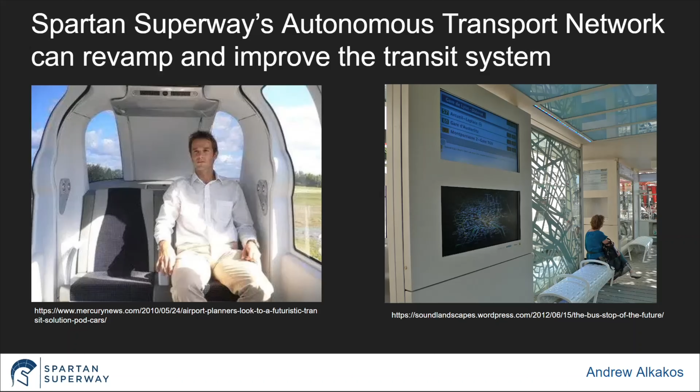Solar powered. Being powered electrically has many benefits relating to the environment. Exclusive guideways, ensuring a familiar and solo path that the pods will travel on. These traits of the Spartan Superway Project can be vital for our modern times that we live in today. The Spartan Superway Project consists of 4 teams: Switcharm, Track, IoT, and Boogie Chassis. The Boogie Chassis specifically, however, holds a high importance and is vital in many various industries.

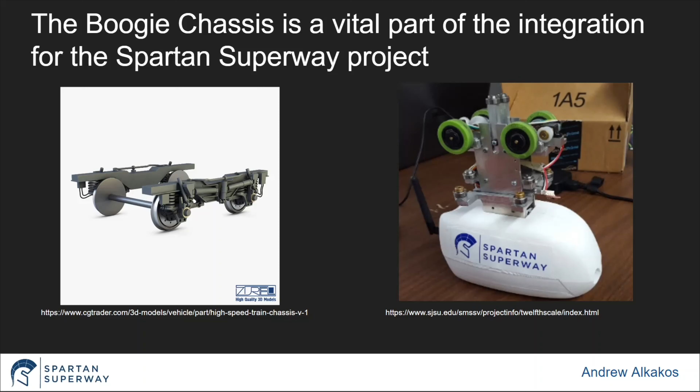The role of the Boogie Chassis Team is an integral part for the project. We serve as the base of the movable pod, as seen on the right picture. And because there are a lot of specifications and dependencies that teams need from us and we need from them, our project is even that much more important. This will be talked about later in the presentation.

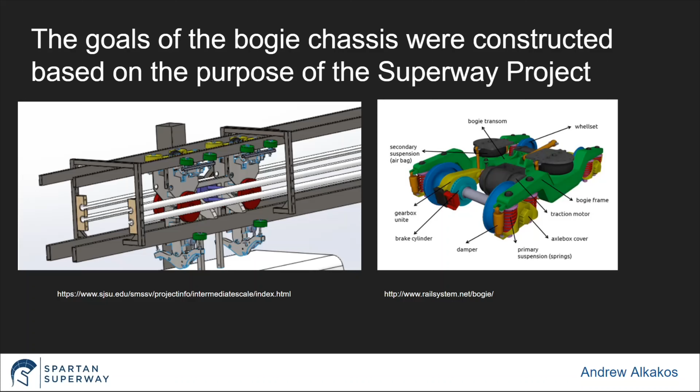Our particular project is to create a Boogie chassis that carries its energy supply and operates under wireless control while withstanding a designated load on the 10-meter scale model guideway. More specific tasks can be divided up into 4 different categories, such as mechanical design, sensors, power systems, and suspension. To achieve this goal that the Boogie team has, it is important that all the teams can integrate together smoothly to ensure the project as a whole goes soundly. Now, I will hand it off to Kristian to introduce the mechanical team slides.

We will now get into the progress that we've made on the mechanical team. Manufacturing is a major dependency for the Boogie and Chassis team. We want to ensure that anything we design is realistically attainable, considering the limitations of the manufacturing equipment that we have available to us. A majority of our manufacturing and prototyping will be done utilizing the machining equipment in the student machine shop, as well as the 3D printers in the Spartan Superway Design Center. We are currently waiting on confirmation regarding access to the SJSU Central Shop, as this would grant us access to the CNC machining equipment as well as the water jet.

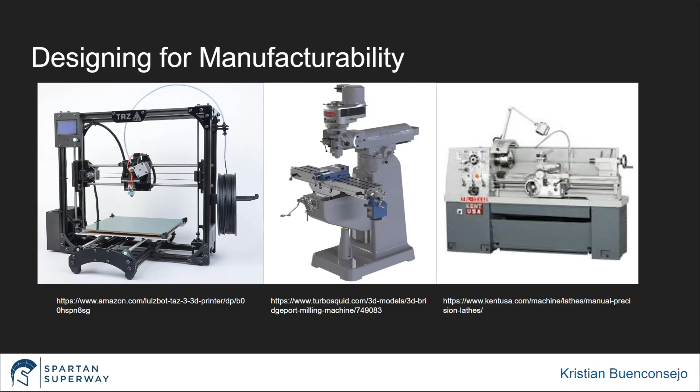As we move forward from the development phase and into the prototyping and testing phases, we will utilize the versatility of 3D printing and leverage its capabilities to get a better grasp on how our design actually interfaces with other components of the system, i.e. the track, switch arm, electrical components, and the cabin. This is extremely useful as we'll be able to try out various prints and designs and solutions in a short amount of time, and material consumption is generally more cost-effective than using metals to prototype.

Lastly, 3D printing will also help us reduce the overall weight of the bogie by enabling us to print out any components where metal is deemed unnecessary. Up next is Max, and he will be discussing design objectives, specifications, and challenges to overcome.

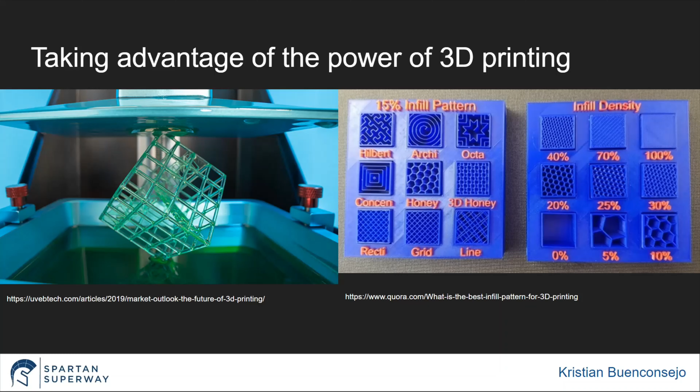It is expected that problems will arise during the design process, and specifications need to be created and implemented in order to solve these problems. First, the chassis must have the strength to support applied loads due to passengers, carriage, and traversing turns in the guideway. A suspension system needs to be implemented to minimize the rocking and vibrations from track irregularities and going around turns.

A 100-pound load will be applied to the bottom of the bogie to represent the passengers and carriage at this scale. The chassis needs to be compatible with the existing 10-meter track. To fit the current track, the bogie will have 4 wheels resting on the top of the guideway and another 4 wheels tilted 90 degrees to prevent lateral movement.

The existing railway gauge has a tolerance of plus or minus a quarter inch, thus the top wheels must have a 6.5 inch gap between them. In addition, the inner guide wheels must fit within a 6-inch envelope. In order to consider the bogie functional, it must also be able to navigate autonomously across the guideway using the data collected by the various sensors throughout the Superway system.

The bogie needs to be able to start and stop moving at a smooth pace for passengers, and we will be designing it capable of accelerating up to 12 miles an hour in 10 seconds. The bogie also needs to come to a complete stop at charging stations, close enough to wirelessly induce charge back into the battery. The battery will need to be sufficient to power all electrical equipment on board the bogie.

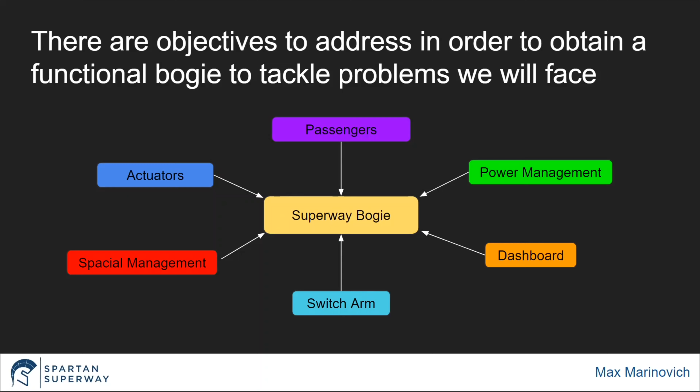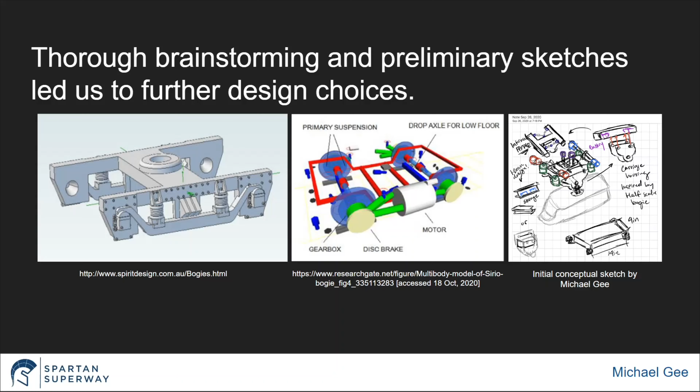During the brainstorming phase, we used a traditional chassis similar to the center picture on the slide, and we attempted to modify it with electrical components. One obstacle for design was suspension. The current design has taken inspiration from the first image for testing. The far right image on the slide was an early concept sketch showing components desired, such as cable management housing, switch arm platform, carriage attachment, and attachments for lateral wheel supports. Next, Max, Carlos, and I will introduce the progress we've made on the chassis.

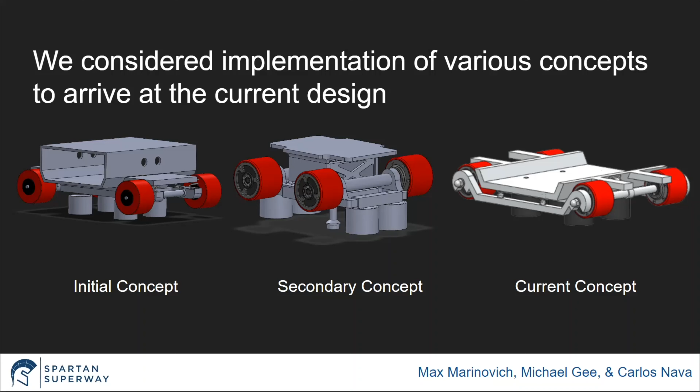Alternatively, the secondary design focuses on a smaller footprint with more experimental ideas and concepts for implementation. Next is Carlos with the current concept. Finally, the current design is a larger model intended to fit most of the components in a single surface. Michael will further expand on the secondary concept.

Alongside the development of the main bogie chassis is our experimental second design. For the secondary design, the design philosophy is to create a bogie chassis with a smaller footprint. Additionally, we wanted to emphasize modularity with attachable components to the chassis. These components include the cable management housing, switch arm cover, lateral wheel support, and pseudo-carriage attachment. Compared to the current design, the length and width are significantly shorter.

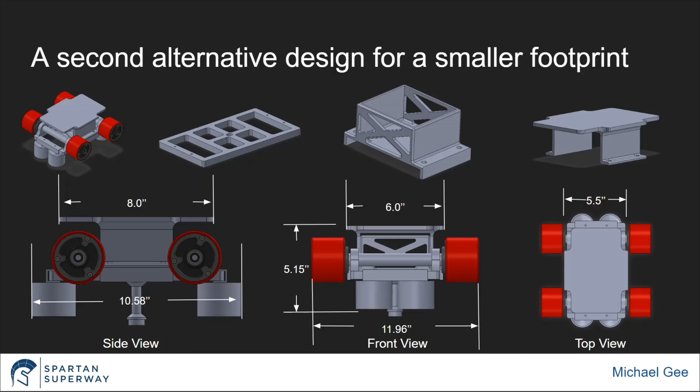In order to accommodate for the dimension constraints of the switch arm, we created a switch arm platform that doubles as a lid for cable management housing. The only downside to this design is that it does not have a suspension system. Next, Carlos will go more in depth on the current design.

The dimensions are subject to change if any new constraints appear when integrating with other systems, such as the track and switch arm. One thing that won't change are the main components that make up the bogie.

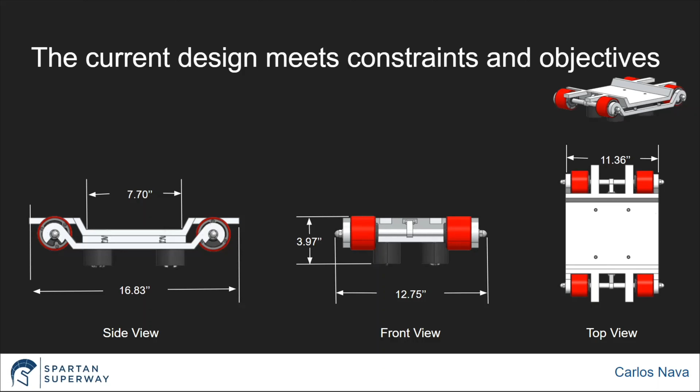The main components incorporated into the bogie design consist of the main bogie frame that will contain all the electrical components, such as the sensors and power system, in addition to the switch arm. Second, we have an axle that is fixed to the bogie chassis by an axle clamp, hinge, and dowel pin that will allow the components to rotate as the bogie oscillates.

Then we have lateral stabilizer wheels that will maintain the bogie on the track and restrict it from shifting laterally, which will be mounted using 1/4-20 bolts and wing nuts for easy installation. The suspension system is comprised of the suspension link and springs to counteract the vibrations acting on our bogie. The suspension is connected to the Maytech hub motors using 3/8-16 washers and cap nuts.

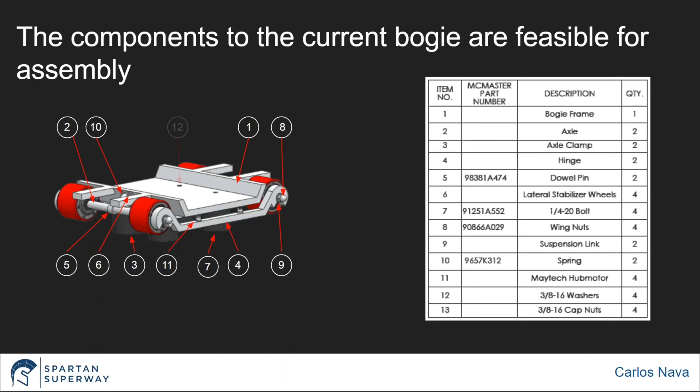The main components on the bogie can be clearly seen in the animation. In order to demonstrate how precisely all the components fit together, an exploded view of the bogie was performed. This is how the bogie is intended to be assembled and disassembled.

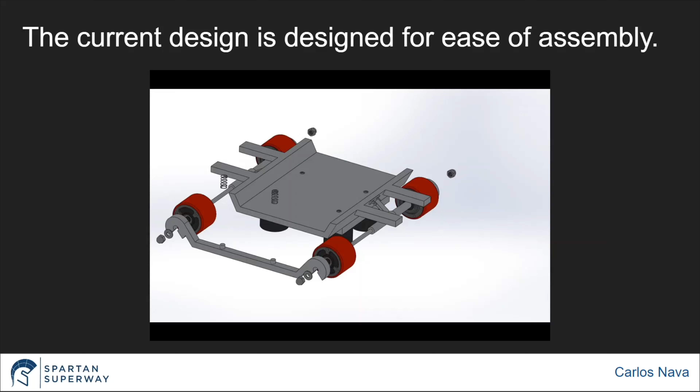For the first step, the cap nuts are unscrewed to enable the removal of the suspension system. Second, as the suspension is removed, the hub motors can be removed from the axle. Third, the lateral stabilizer wheels can be removed by unscrewing the wing nuts from the bolt. Lastly, the axle can be removed by removing the dowel pins from the hinge.

In order to decrease the amount of stress at the location, fillets will be added to avoid stress concentrations at the sharp corners, given that circular shapes are stronger and more resistant to deformation. Next, Devin will develop more on the electrical side of the bogie.

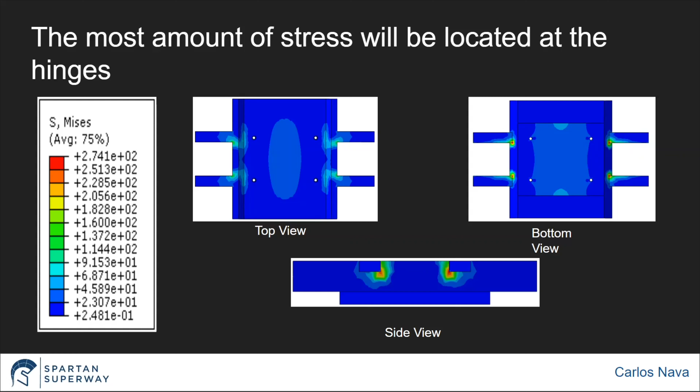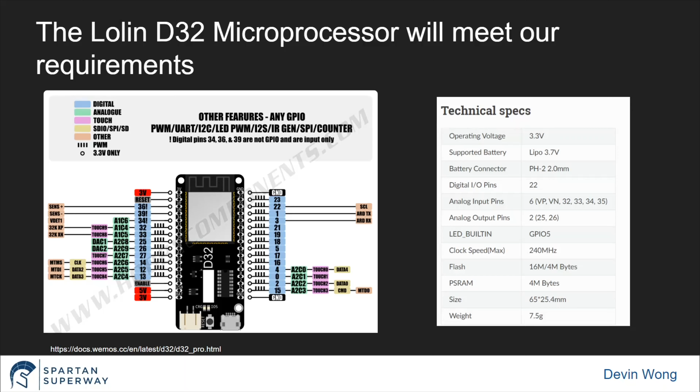Thanks. This is a general overview of how the power distribution board is going to be designed. The ESC and power distribution board get a direct connection from the battery. The power distribution board is a circuit that distributes electrical energy throughout the system. This includes the sensors on the bogie, which consist of a LiDAR, an inertial measurement unit, and a Lolin D32 microcontroller, the switch arm stepper motor, and microcontroller as well.

There are 2 solutions to monitor the state of charge of our battery. The first solution is using Coulomb counting, also known as the current integration method, which calculates the SOC by measuring the battery current and integrating it in time. This method is easy but suffers on a long-term basis due to the lack of an updating reference point, such as resetting the SOC to 100% when a charger determines that the battery is fully charged.

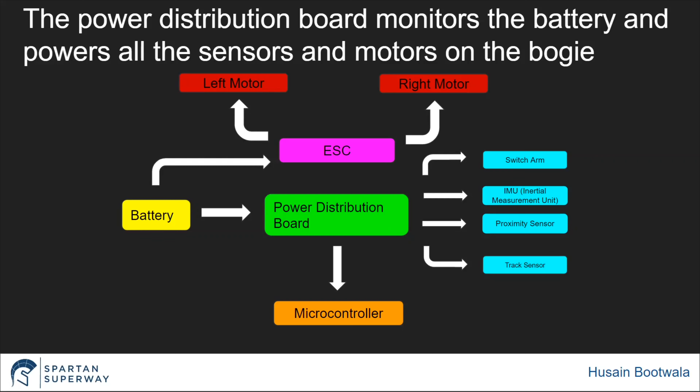The second option is using a Kalman filter to predict the overvoltage due to current and combining it with Coulomb counting, which provides a much more accurate reading, although this process is much more complex and is a contingency plan. On the next slide, we talk about how there's just going to be one battery on the bogie that powers all the different components comprised in it.

The reason LiPo was chosen is mainly because of its efficient cycle and higher energy density, power density, as well as the nominal voltage. The maximum current draw for the battery is going to be 11 amps, which will be for the motors to move the bogie with the weight defined. The motors can handle 11 amps of current on 22.2 volt input without an issue.

A battery with a capacity of 5,000 milliamp hours when discharged at 2.2 C can easily produce 11 amps of current and hence allow the bogie to function for around 0.4 hours on a single charge. The other components of the bogie need either 3.3 volts or 5 volts and minuscule current compared to the motors. Therefore, the battery sizing needs to only take into account the motor parameters. Next, we have Alex, who will talk about the brushless DC motors and the ESC.

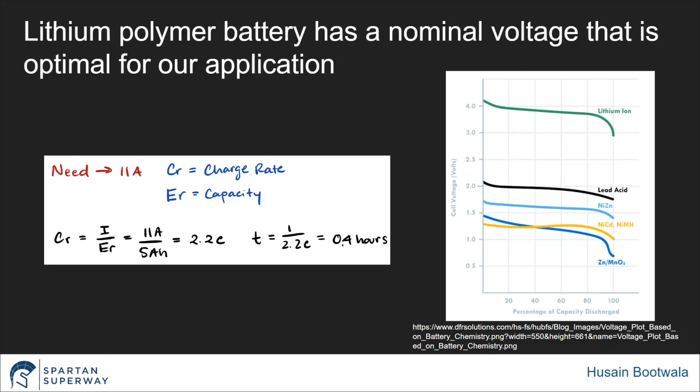A 3-phase brushless DC motor is required because we think it has less overall maintenance, has a high output compared to its size, and superior thermal management compared to brushed DC motors. The 3-phase also generates a high resolution and is more energy efficient than a single-phase motor. Encoders are required to tell us the acceleration and velocity to verify the speeds of the bogie during deployment.

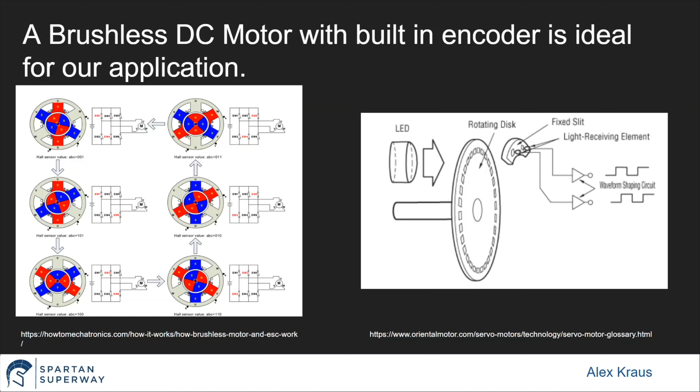Ability to drive the motors at different speeds is required to account for differentials during turns, since a gearbox will be too bulky for the bogie's design. So we need a high torque brushless motor with 3 phases that has a built-in encoder. So we picked the Maytech brushless 70mm motor and Flipsky speed controller to meet our specs.

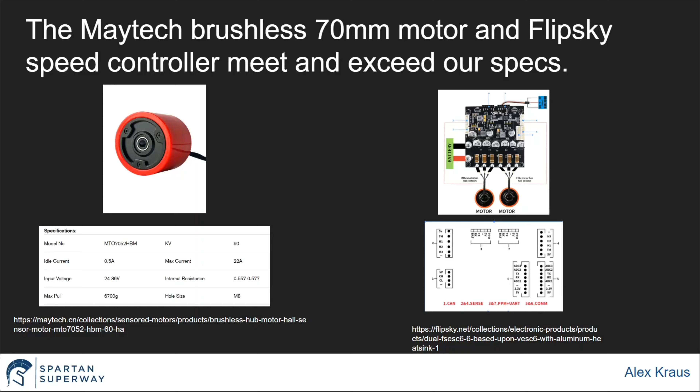The brushless motor has a kV of 60. That means that it has a fairly high torque given its size. The Flipsky is small, lightweight, and supports UART communication. It's rated for the battery and has a max voltage spike of 60 volts, so it's well within range to protect the motor itself. Now we'll discuss how the Maytech motor is verified.

The Maytech motor is verified using the kV value. A rough equation is used that calculates torque, comparing it to the input amperage and the kV. Torque can also be determined by using dynamics, and then we can verify that the torque required to move a 68 kilogram mass from 0 to 15 meters per second in 10 seconds is 1.5225.

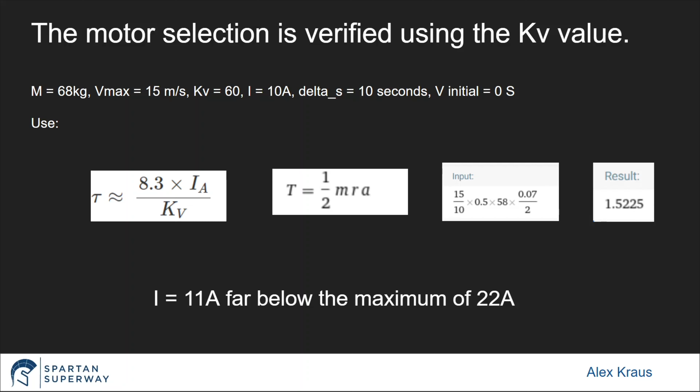For reference, the 68 kilogram mass and the Vmax are both well over our scope that we anticipate the bogie to actually move at, as we want to give the motor plenty of leeway. So we found that we only need 11 amps to meet this criteria, which means that we should be well within our range for the actual final design.

For the code base for the motors, we'll be coding in C++. We're using given libraries for the VESC, and we're going to be packaging it in JSON files. The JSON files will be then sent to IoT. Next, we'll be coding the motors to ensure that we do the differential gear drive to better bank the curves for the actual motors. Next, we'll be passing off to Devin to discuss the IMU.

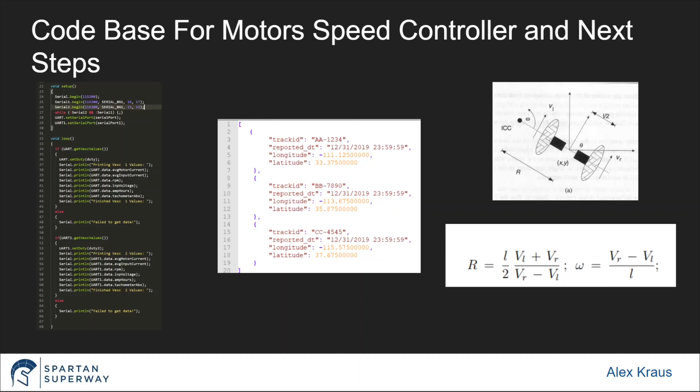The purpose of the IMU is to measure bogie tilt and acceleration. We will use the board to ensure that the bogie does not exceed 5 degrees of tilt or half a G of acceleration around corners. We chose the LSM9DS1 board for its low cost and functional specs. It accepts an input voltage of 3 to 5 volts, which works well with the Lolin D32.

This board is small, lightweight, weighing only a couple grams with a size of 1 inch by 0.7 inches. Its resolution is 16 bits and has both I2C and SPI serial communication capabilities. For our applications, speed is very important, so our team will use SPI as it is faster than I2C.

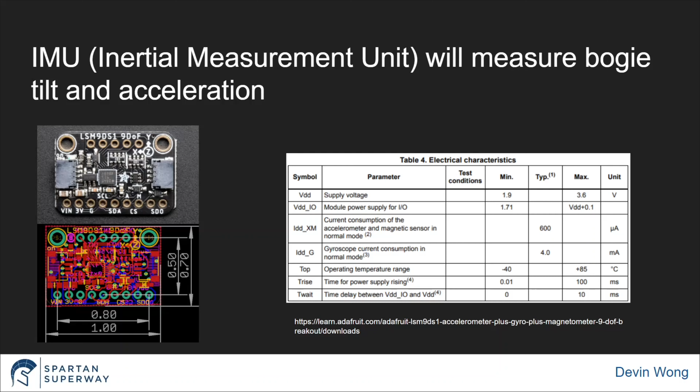We will also implement a complementary filter for the IMU. The IMU consists of a gyroscope and an accelerometer. The gyroscope is faster, but is also prone to drift over time. The accelerometer isn't prone to drift and is more accurate, however, is slower. A complementary filter will be a compromise and take data from both the accelerometer and gyroscope to get a happy medium between speed and accuracy. Next, Jake will talk about object avoidance.

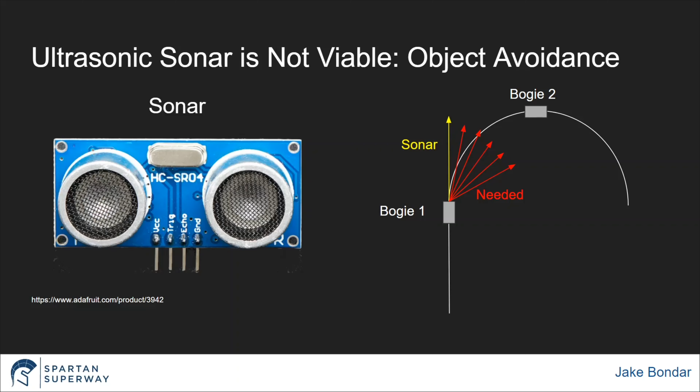When designing the obstacle avoidance system, we evaluated a few different sensor options. We initially looked at line of sight sensors, specifically sonar. The main benefits of sonar were the small, lightweight build and the budget-friendly cost of $5. Unfortunately, sonar in this implementation is not very precise and did not have a viable field of view to account for turns in the track.

We also looked at using a camera with machine learning. The benefits of the camera are that it has a wide field of view, can be used with existing machine learning software, and some implementations have their own processor. We decided against using the camera because it would have been time intensive to implement and there would be issues aliasing data.

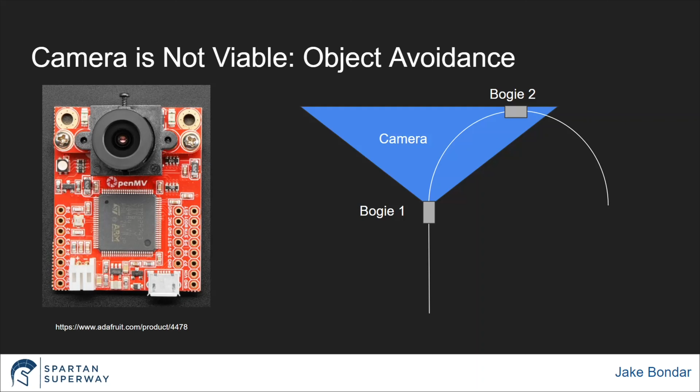We eventually landed on using a 2D LiDAR system in the form of the Slamtec RPLIDAR A1. This system has a 360-degree view and is more accurate than any of the previous systems. The A1 has a maximum range of 6 meters and a minimum range of 0.15 meters. The resolution is either less than 1% of the distance the light travels or less than 0.5 millimeters.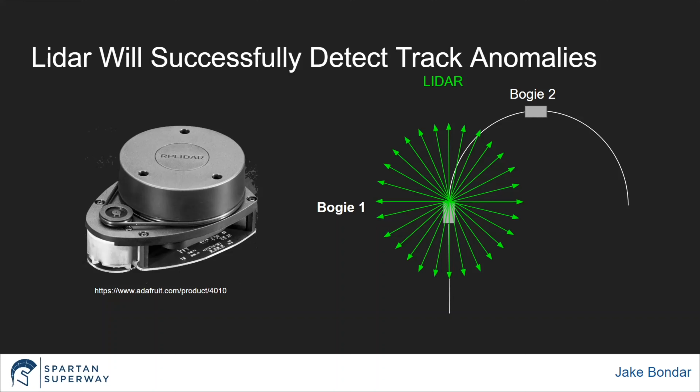Our first implementation of the LiDAR will be based off a state comparison. We will use the map that we generated of the track, then compare the map to the current state. Using our algorithm, we will determine what constitutes a state being out of alignment. If the state is out of alignment, we will stop the bogie. The first implementation relies heavily on a separate system that will let us know the bogie's location on the track.

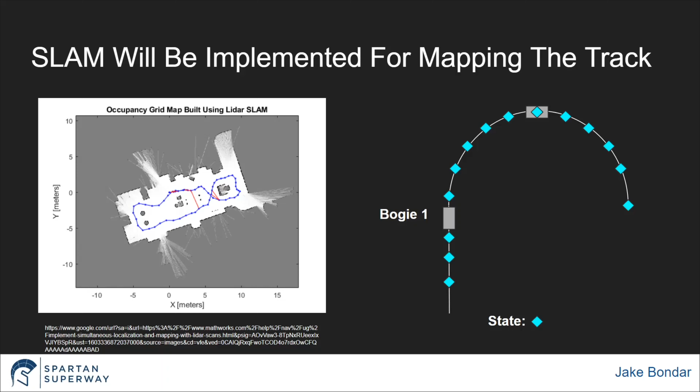Our second implementation will use simultaneous localization and mapping, or SLAM. SLAM will use pre-generated maps of the room to determine the bogie's location. SLAM effectively cuts out the dependence on any other team for knowing the location of the bogie.

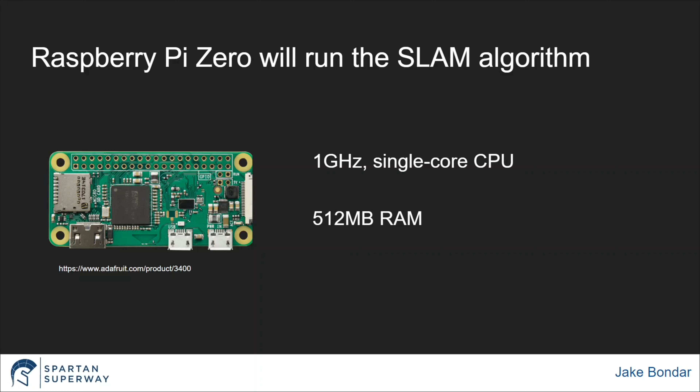To power the algorithms we will use for LiDAR, we chose the Raspberry Pi Zero. Most algorithms that are used to implement SLAM rely more on RAM than CPU power. For that reason, we decided to start with the Raspberry Pi Zero instead of a CircuitPython board. Pi Zero should have enough CPU power and RAM to run the algorithm. Next, I'm going to pass it off to Alex to talk about dependencies and contingencies.

Being the bogie team, we have a couple dependency contingencies since we are so core to the rest of the development. For the switch arm, we need the total weight of the switch arm system in order to validate our final motor. Our contingency around this is essentially just making sure our motor is well above spec, so it can handle a stronger mass than we ever expect any single team to have.

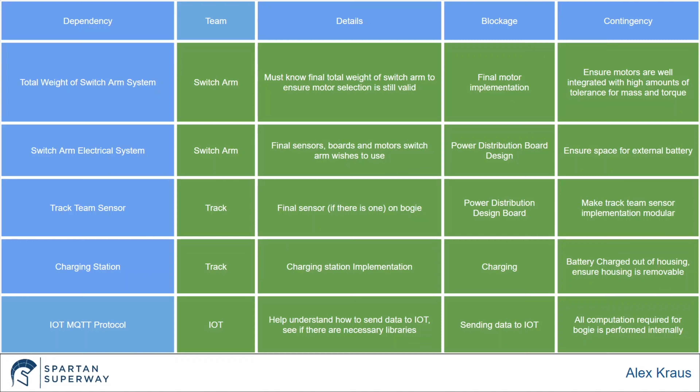For the switch arm electrical system, we're waiting on the final sensors, boards, and motors to ensure that our power distribution board accurately and correctly gives it the power it requires. If that does not come through, then we're just going to ensure there's extra space for an external battery so switch arm can do all of its stuff on its own. We are also waiting on the track team's final sensor, if there is one, to go on the bogie to also implement into our power distribution board. If that does not come through, then we're just going to make the track team sensor fairly modular, give it a simple 3-pin connector.

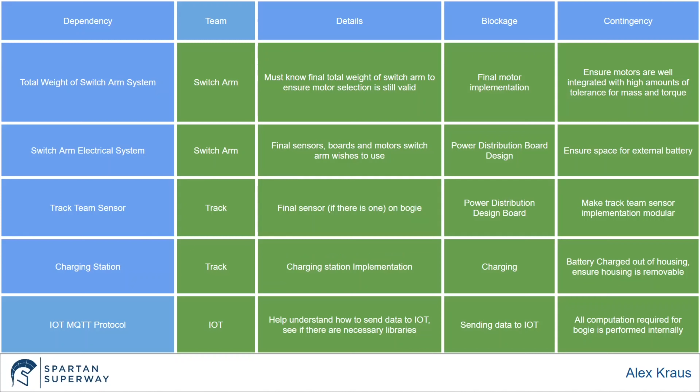For the charging station, we need to be in collaboration with track team to figure out what the best way of approaching that is going to be. If that doesn't come all the way through, then we're going to have the battery housing be modular, so the battery can be charged by just removing it from the bogie itself. Finally, we're waiting on IoT's MQTT protocol, so a walkthrough of how to send data to IoT. If that doesn't come through, then we'll have all computation performed internally on the bogie itself.

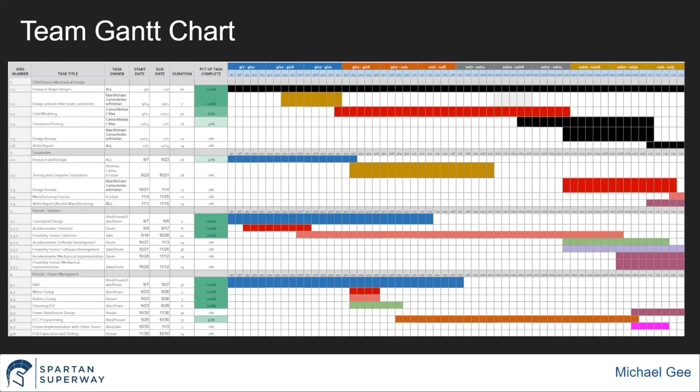During the time of this presentation, these are some tasks we have completed and are working towards. On the mechanical team, we are collectively on track with the CAD design of the bogie chassis. As we approach the end of October to early November, we will have an official design that will be reviewed for further analysis and testing. We're currently in the middle of completing the final solid model. For simulation and testing, we're using the program Abaqus. However, we might use SolidWorks FEA in combination with Abaqus for more conclusive results.

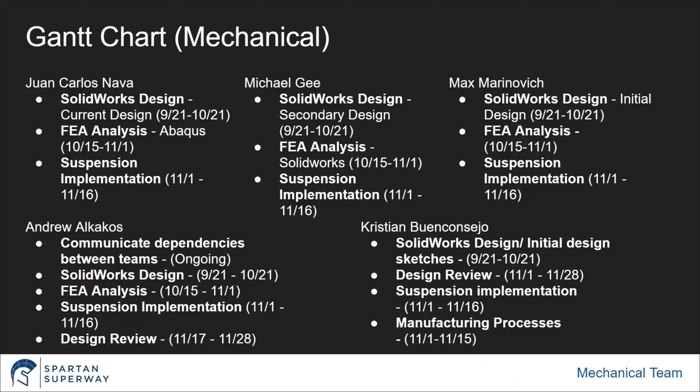For suspension, we are slightly behind in terms of implementation due to designing all the other components involving the bogie chassis. To deal with the delay, we'll be delegating 2 of the mechanical members to get a head start on implementing a more robust design of the current suspension system. Next will be Devin on the progress with electrical.

Currently, the electrical team is making good progress. Motor sizing, battery sizing, and sensor selection is all done. Currently, the programming for the ESC, IMU, and proximity sensor are being worked on. There has been success with getting the microcontroller to communicate with the motors. As we go into November, our main focus is finishing the software for IMU and ESC. The power distribution board should be started as well as the proximity sensor. Progress on proximity and power distribution will be made throughout next semester.

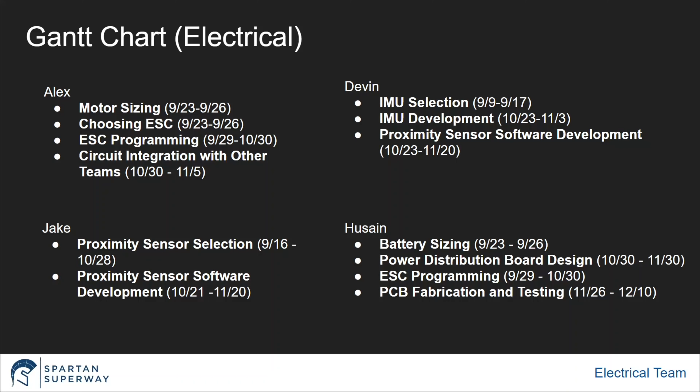This concludes our presentation. We will now take any questions.